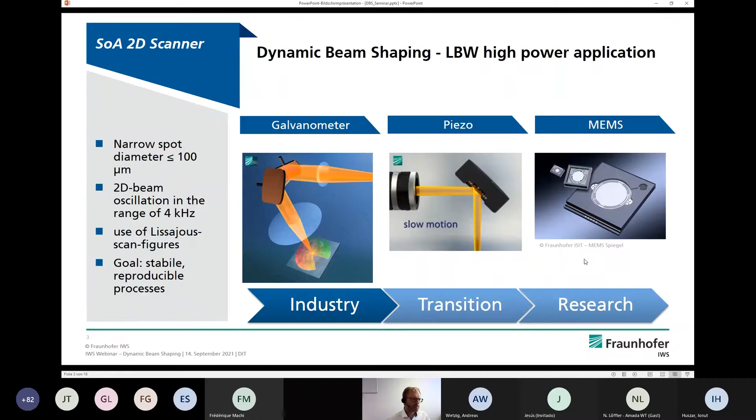If we are talking about 2D beam oscillation with galvanometric driven mirrors, we usually use fine laser sources, for example single mode fiber lasers with Gauss mode, and then we oscillate in a circle, overlaying them with the welding speed. Depending on frequency and welding speed, we obtain different energy depositions.

That could be a homogeneous or an inhomogeneous energy deposition, and therefore we usually calculate this with a specific software tool before we start the welding process.

The same would be the case for scanning a figure in the shape of an 8, and here again, using different frequencies or different amplitudes, we can modulate the energy deposition as shown here. So we have a lot of varieties to interact with the laser beam and the material.

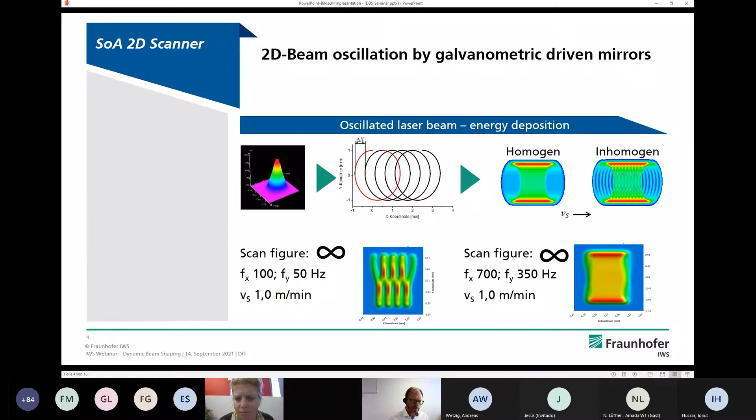Here is an experimental overview for 2D beam shaping with high frequency. We used a 5 kilowatt single mode fiber laser with a really small core diameter, and we obtained a focal diameter of about 33 micrometers. We have used this for welding copper material, which is shown here.

You see on the left-hand side, we have a penetration depth variation between 0.4 millimeters and 3 millimeters. We do all of this in one setup, only by changing the laser parameters, as well as amplitude and frequency of the oscillating laser beam.

Therefore, we are using a circle, as shown here in this small figure, and so we can have different penetration depths and high quality laser beam welding results, especially for these low penetration depths.

The oscillation gives us an opportunity to obtain a smooth surface appearance of the weld seam, as shown here. This wouldn't be possible with a static laser beam.

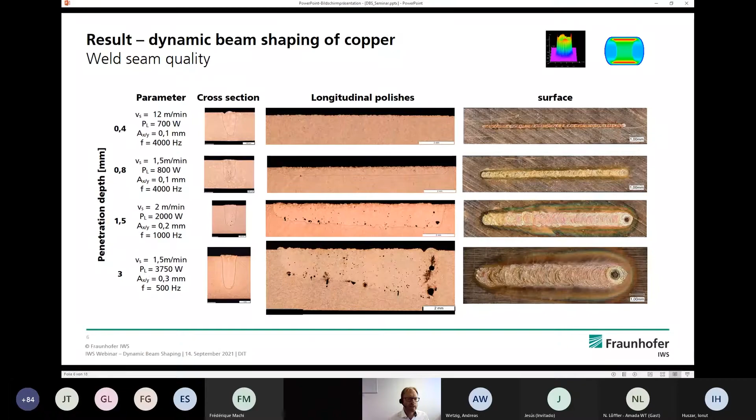Therefore, you would be forced to have at least 2 or 3 optical setups to reach equal results, or maybe not even this homogeneous weld seam distribution, maybe with a lot of inhomogeneities at the surface. Coming now to the second point, 3D beam shaping. Here I would like to give a short motivation.

What we are facing in our research work is that there is a need for a lot of individualized and flexible processes to extend process limits. Therefore, it's not only about the geometry that we are welding, it's also about the material combinations, mostly for mixed materials that I have already addressed, and to be able to have a 3D processing which is quite fast compared to standard welding approaches.

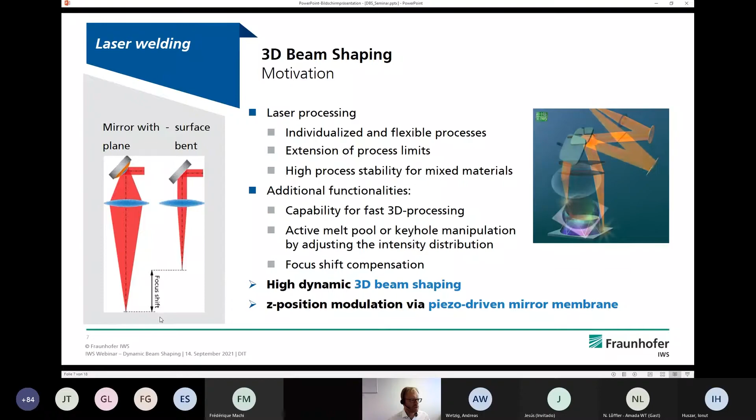The third point would be to have the opportunity, by a piezo-driven unit, to shift the focal position. That is done by changing the plane level of this piezo-driven element, and then you are able to shift the focus properly.

What allows us this is shown here. We have an optical path consisting of collimation, and then a 3D piezo-driven actor for shaping the Z modulation or for moving the Z axis, and then a 2D scanner for moving the laser beam in X and Y direction.

As shown here, if you have no opportunity for this 3D beam shaping, then you would have the issue that if you place a sheet under 30 degrees under the optics, you would have the opportunity to weld the circle, but not achieve full penetration. If you use the focus readjustment, then you have the opportunity to weld the circle with a constant penetration depth. This is one example of 3D modulation.

There are, of course, many more examples with regard to focus shift and so on. At the end, I would like to conclude shortly.

I think what is possible right now is that we have a lot of processes where we actively stabilize the process by 2D beam oscillation. This is also shown by some weldings for aluminum die-cast material, which is already used in industry. We are using the 2D beam oscillation quite successfully with reduced spatter and smooth seam topology.

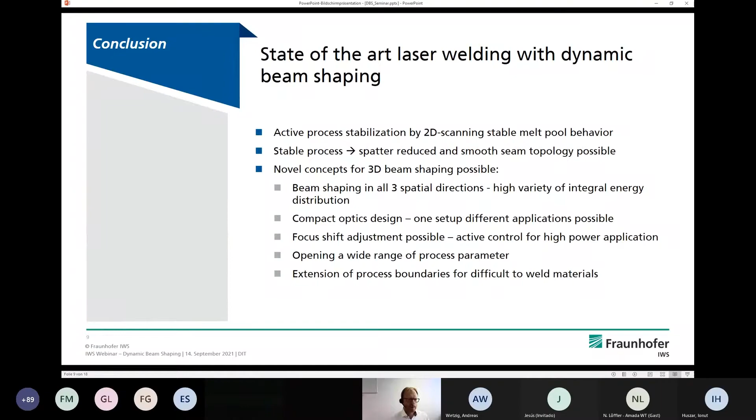We are able to have an active focal shift adjustment, and to do this for high power applications. That opens up a wide range of new process parameters for laser beam welding processes.

At the end, I would like to give a short outlook to the presentation that Andreas Wetzig will give you a bit later regarding this CBC laser source, which we have available here. The opportunities that we have with this laser source will be quite larger than the ones that we have, for example, with 2D beam shaping.

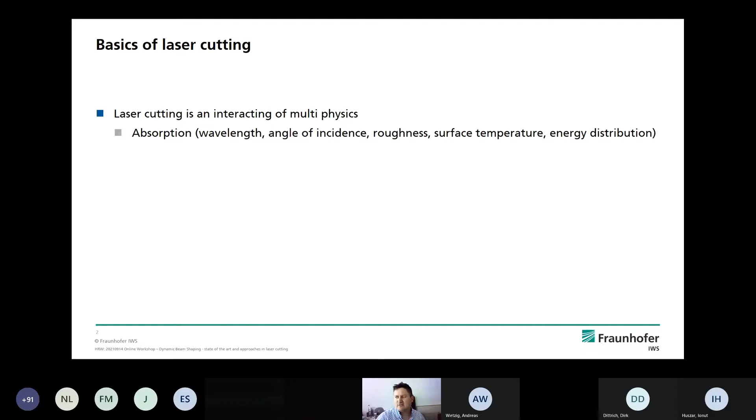The absorption depth of laser radiation is a few nanometers. That means we also need a kind of energy transport to the volume of the process zone. This transport depends on the temperature gradient of the process zone, the heat capacity of the material, and of course also the heat conduction of the material.

And if the material is molten, we also have to eject it. Ejecting depends on the used nozzle, the pressure of the gas we are using, the kerf geometry we are achieving, and of course also the temperature of the kerf surface. So these are, from my side, the three important physics basics we have to consider.

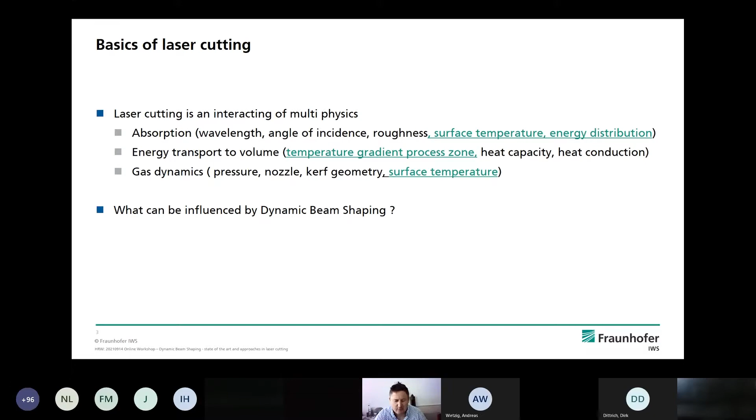But the question is, what could be influenced by dynamic beam shaping? If we look at these three bullet points, we see in every point there is something with temperature distribution and energy distribution. So what we can do with dynamic beam shaping is influence the interaction time between laser beam and material, and manage the number of repetitions of these interactions.

This is no magic, this is well known. All users of laser machines do pulse mode if they want to achieve higher quality, but pulse mode will reduce the output of the machine. So the approach of dynamic beam shaping is to not switch the laser on and off, but to distribute the energy in the process zone.

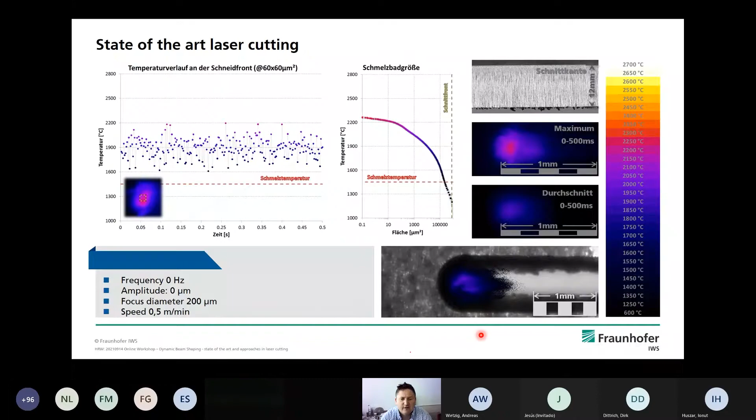So please remind these parameters: we are not using dynamic beam shaping here. Our focus diameter is 200 microns, and the process speed for this cut is half a meter per minute. Please keep your eyes on the width of this cut kerf. If you use dynamic beam shaping, you're able to use a special focal position, a quite higher focal position, which allows us to achieve a smaller cut kerf.

Everybody knows if we do it by standard cutting, we'll get worse cutting quality, so we call it a plasma cut. But if we superpose this with dynamic beam shaping, in this case using a frequency of 300 Hertz and an amplitude of 300 microns, we can achieve quite good quality. And if you look here, also at quite high process speed—we could increase the speed from 0.5 to nearly 1 meter per minute.

What we can see in the diagram and also in this small image or video below is a pulsing of the surface temperature of the cutting front. So we can see that by distributing the energy, we also influence the surface temperature.

And as you remember from my first slide, the energy or temperature distribution will have an influence on the material transport. And even the cut quality is quite better compared to the beginning. So from these two slides, we can see there is a quite large impact when using dynamic beam shaping, and we could increase the quality.

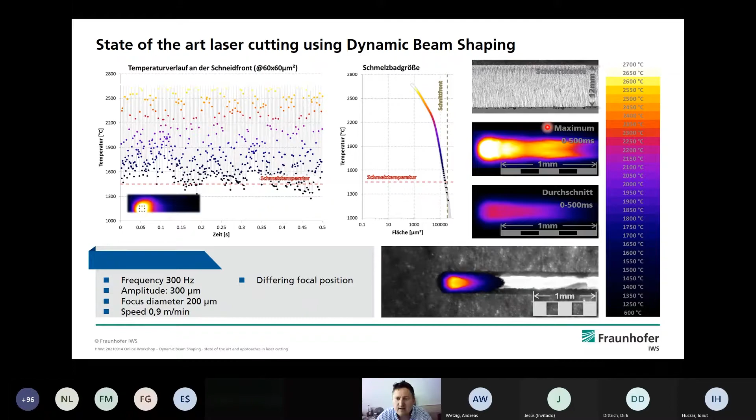So dynamic beam shaping is a quite wide field. We have a 2-axis scanner, which makes it possible to do it in X and Y, and we have a wide range of frequencies and amplitudes. So we can achieve quite different beam shapes.

In this diagram, you see on the X side different beam shapes. We try to name them like how they look: a circle, an 8, or a horseshoe. And we also have our standard state-of-the-art stationary beam. I try to put into this diagram two different parameter sets.

You can see we have a wide range if using dynamic beam shaping to achieve different targets. Here we show a shaped beam with a nearly dross-free cut and smooth roughness, compared to an unshaped beam, where you can see the separation line and quite hard dross attachments. Please keep in mind we are cutting 12 millimeters here using only 3 kW of laser power.

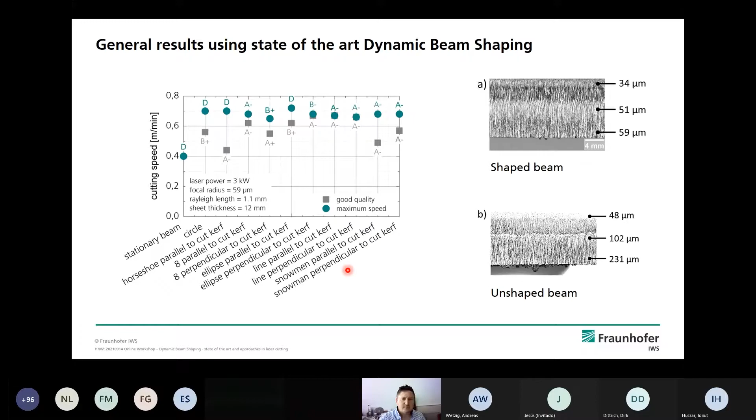So what could we do with coherent beam combining? That's the question I'll try to answer. We can reduce the interaction time between beam and material, and increase the number of repetitions. To see the potential, I made a small calculation.

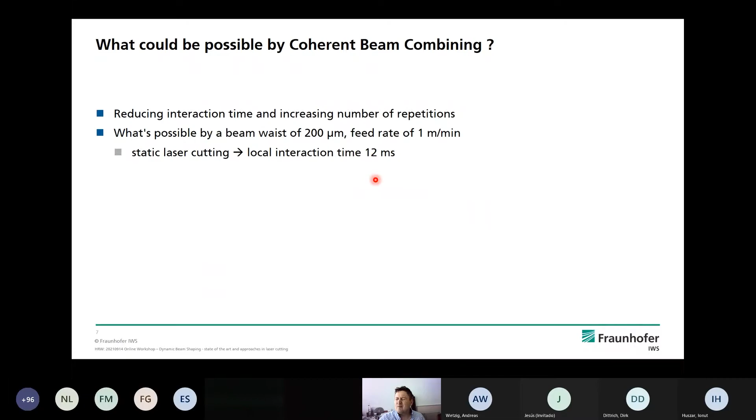Remember, we are cutting this 12 millimeters with a spot diameter of normally around 200 microns and a cut speed of 1 meter per minute. That means for a static beam, we have an interaction time between material and beam of 12 milliseconds.

If we apply dynamic beam shaping with a frequency of 300 hertz and 300 microns using a sinus function, we can calculate the superposed speed of the moved beam. The moved beam of dynamic beam shaping will be in the range of 100 meters per minute, meaning we can reduce the local interaction time from 12 milliseconds down to 120 microseconds.

If we go to the next level, that means CBC. CBC should be able to modulate the beam in the range of 2 megahertz, which means we have the possibility to reduce the interaction time down to 500 nanoseconds.

But the question is, should it be useful? I couldn't answer this question in detail. We have to do some experiments which are scheduled within the next months. But I can give you a picture of my view.

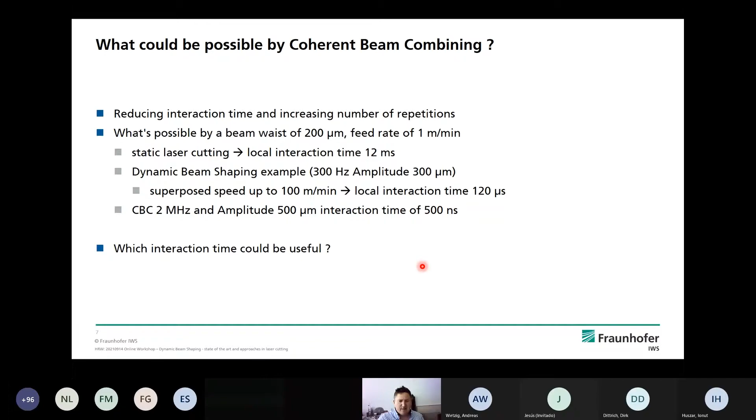Looking at pulsed laser applications, we know that if we reduce the pulse length or the interaction time between material and laser beam, we could increase the quality. Of course, I know the important point is not just the laser pulse, but also the long break between pulses. Still, this should give you an impression that we can influence the process by reducing the interaction time and increasing the number of repetitions.

So I tried to calculate what's possible. You see this table here. I tried to calculate the interaction times and significant beam diameters. 50 microns should be what's possible with the CBC laser, and 200 micrometers is a common focus diameter for laser cutting.

If we talk about our current state of the art using a galvo scanner, we are able to operate maybe in this field, to be in an interaction time around 1 microsecond or even below. If we use CBC, we can enlarge this region quite well. It's up to 5 megahertz, and we will be in this region to have an interaction time around 1 nanosecond.

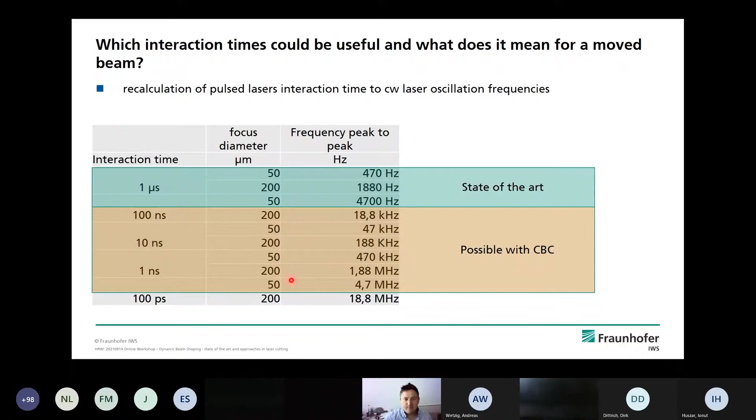You see we have a large adaptation of this functionality that we can use for our investigation in laser cutting. So, I'm now at the end of my presentation. Thank you, and if you have any questions, please feel free to ask.

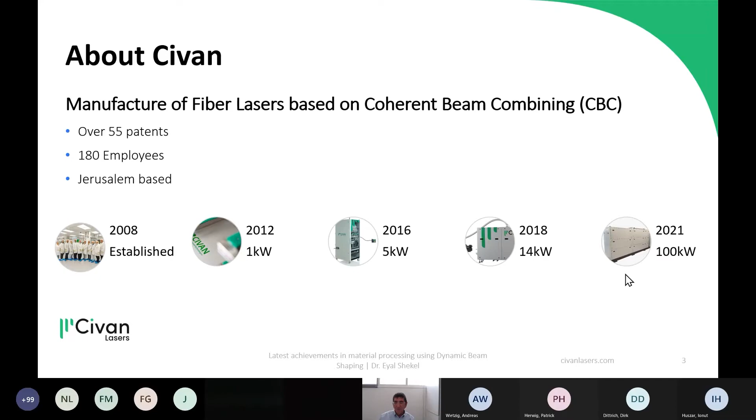Took us a few years to get to the first high power laser. In 2018, we started shipping our standard OPA6 laser to customers. And just a few months ago, we delivered our first 100 kilowatt OPA laser to a customer.

So what is coherent beam combining? It's basically the ability to take many lasers and combine them together to have one single mode output. The way it works is we take some seed laser that can be even half a watt, and then we amplify it. Each one of these triangles is an optical amplifier. We amplify it, split it, amplify again, split again, and amplify again. At the front line, each of these amplifiers can provide up to 1 kilowatt of single mode output. Then we take hundreds of them and combine them to have one combined single mode output.

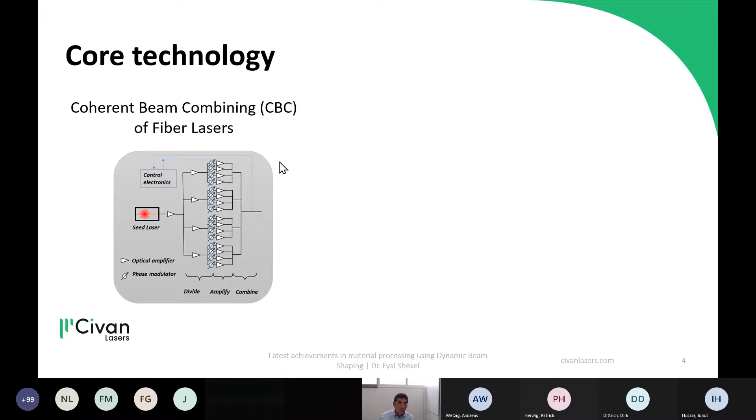That's how we reach more than 100 kilowatt single mode output in our product. We monitor the output, and with some fast real-time electronics, we control the relative phases of these lasers to allow us to do this coherent beam combining. So first of all, here is the ability to get to extreme high power with a single mode output.

But the other part of the technology is what's called optical phased array. It means that we take all these lasers and they emit light in parallel, and there is an overlap of their output. Where there is an overlap, there is interaction between the different lasers, and you get constructive and destructive interference. In some points you get constructive interference where all the energy is focused. In other places where there was light before from each individual laser, they actually cancel one another out, and you get darkness.

This is a very well-known phenomena, basically the diffraction pattern or diffraction grating, where in some places you have constructive interference and in some places destructive interference. But if in parallel we can actually control the relative phases of these lasers, we can make this beam move, change position, change shape, and change focus, all by just controlling the relative phases. Now, changing the phases is just an electronic thing.

We can do it at tens of megahertz. There's no moving parts, it's just an electro-optical device, a lithium niobate device. So it's extremely high reliability, very, very fast. And we can get to these very, very high powers of tens or hundreds of kilowatts with this control.

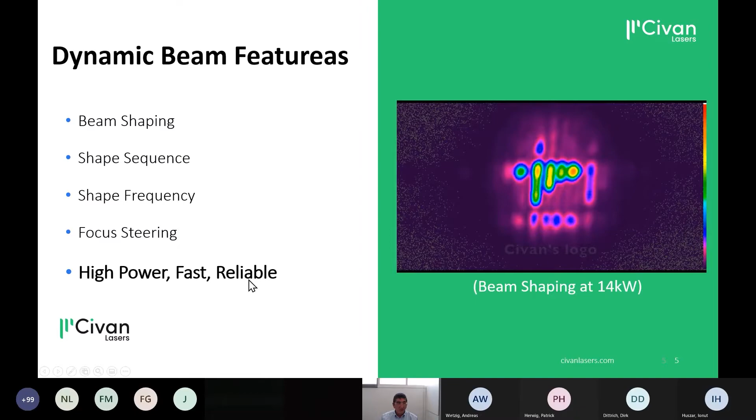And by us, it can move very, very fast at very high reliability, at very high power.

To design these beam shapes, we have this very simple software that we provide to customers, where basically you have a grid and you go with your mouse and click wherever you want energy. Right away, in the window on the right, you can see a simulation of what the beam is going to look like. You can also hover over it with your mouse to see the cross section and know exactly how much energy and what the energy distribution is inside the shape you designed.

You can just go ahead and change the design and immediately see what the energy distribution would be inside this beam. If you click one time, you get some amount of energy. If you click twice, three, or four times, you get more and more energy. So you can really do any type of energy distribution inside this region.

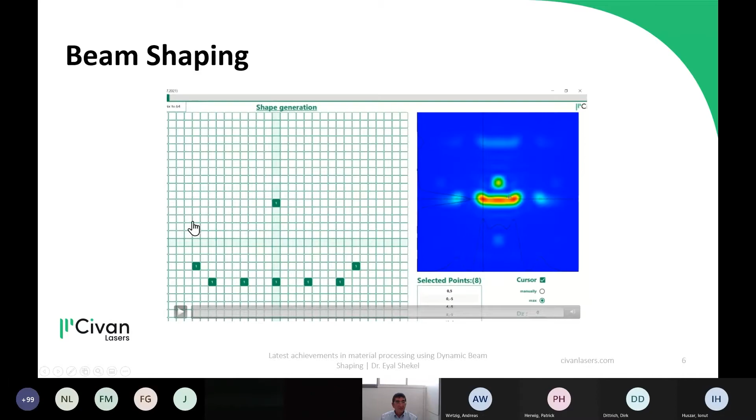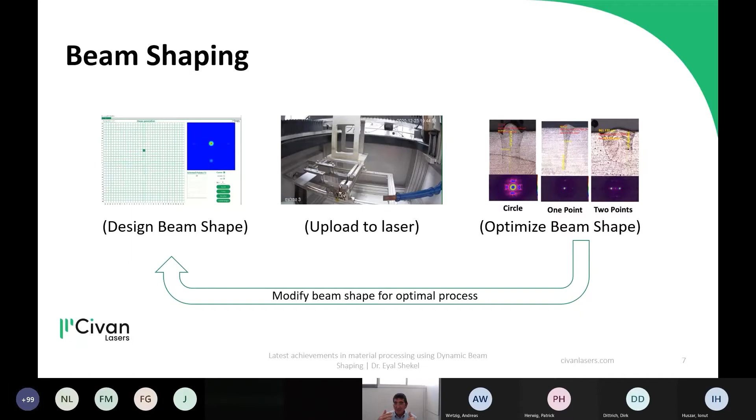Once you have the shape you want, you just save it to the computer, upload it, and do an experiment. You can see different behavior of the weld cross-section when you use different beams, and from this you get feedback and go ahead and change the beam again, continuing this process. Very quickly, you can achieve the optimal process that is required.

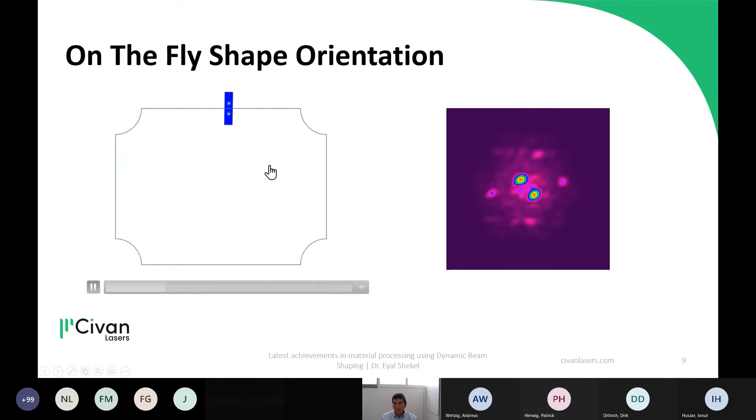Another important element: when we design a beam shape - for example, if we decide on a beam shape of two points perpendicular to the propagation direction, this is the shape we want to use. When we go around and create a part, the orientation of the beam shape always has to stay perpendicular to the propagation direction. For us it's very simple, because we just electro-optically control any shape we want, making sure the orientation of the shape is always correct relative to the propagation direction.

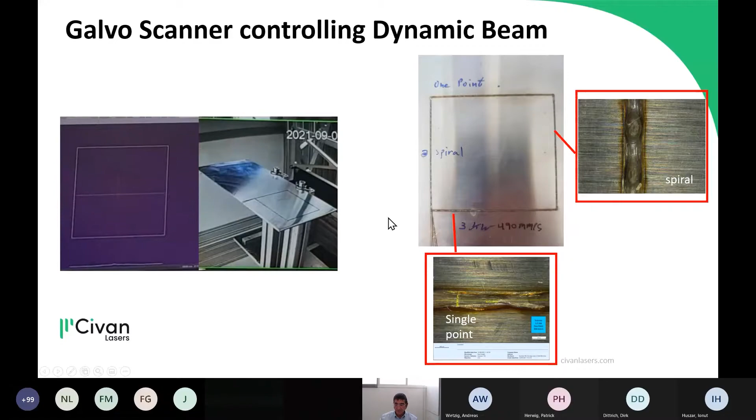Another very important feature is the ability to control the speed of this motion. Like Patrick mentioned, we can do, let's say, a spiral like that. We can move it at 10 megahertz or 20 megahertz to make this beam, so the interaction with every point is in the nanosecond range, or we can move it much slower, as slow as required, and then you can have some kind of dynamic motion of the keyhole in the melt pool, perhaps creating dynamics of the fluid or stabilizing the keyhole.

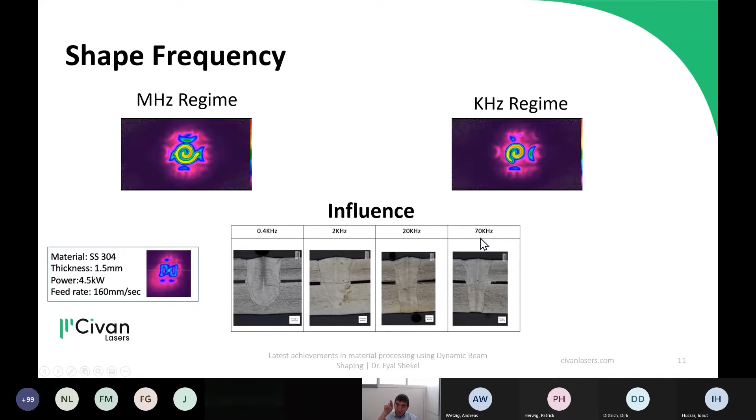Of course, the interaction with the material is completely different. You can see here one shape, with all parameters the same - feed rate, power, beam shape. The only difference is the frequency of the beam shape, or the speed by which we move the beam, and the interaction with the material is completely different.

The next level is actually taking several different shapes and working them in sequence. So we can save some shape, let's say this hourglass shape with some frequency, all the parameters are set, and we save it on the computer. Then we take another shape and save it, and we can actually do 256 different shapes and save them to create a sequence.

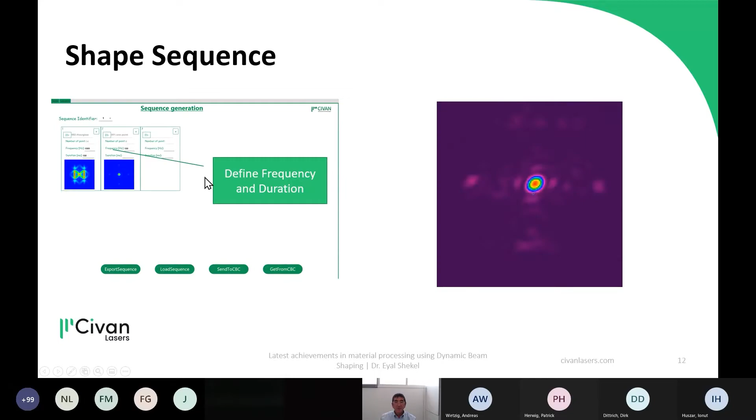By sequence I mean you save it and say, I want the first beam shape for 1 millisecond, then the next beam shape for 10 microseconds, then the next one for 100 milliseconds or whatever, and automatically it goes from one to the other. What you can do with it is all kinds of interesting things.

So for example, if we have here a shape that has a fixed part and a moving part - again, there are many different applications and reasons to do sequences like that, but just to give you an idea of what can be done, having some fixed element of the beam with a moving element of the beam, this is all done very, very easily.

Another interesting application is drilling through a multi-layer material. So for example, if you have a metal coated with some coating, let's say ceramic coating, glued together, and you want to drill through this - of course the ceramic has completely different properties than the metal, so you want to optimize a beam shape that is different for the ceramic than for the metal.

And at the interface, many times there are cracks and separations created when you drill through it. So maybe you want a different beam shape when you go through the interface to protect this sensitive interface region, to avoid these cracks and separation.

So for us it's very easy - you just design a sequence. You do a test and see how long it takes to penetrate each layer. Let's say it takes 150 milliseconds to go through one - of course this is much smaller numbers, but let's say 2 milliseconds to penetrate one layer, 1 microsecond to penetrate the interface, and another few milliseconds to penetrate the metal. For each one you design the right beam shape, and you just drill right through with the changing shapes.

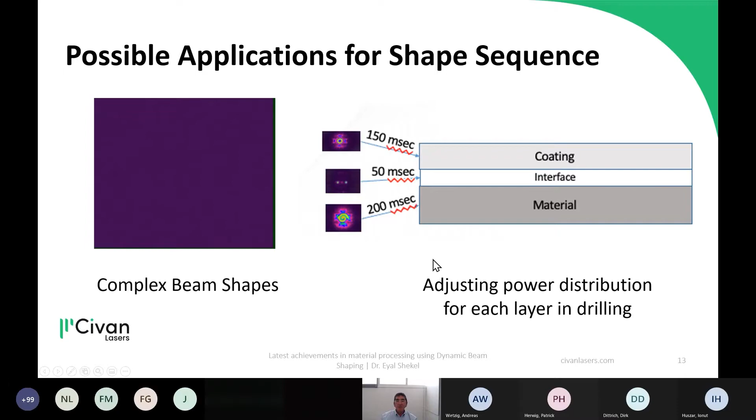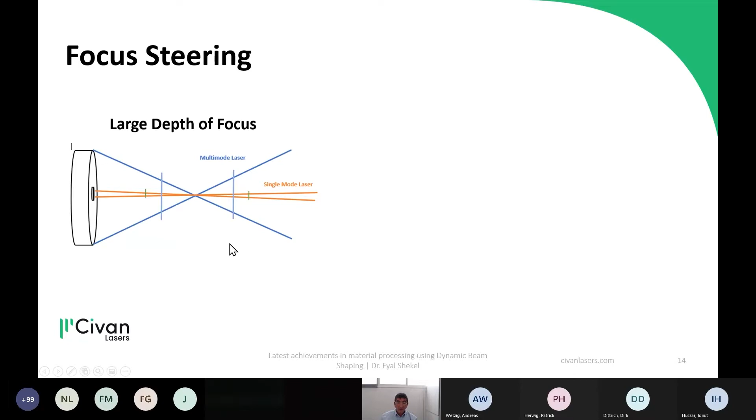But in addition to the inherent depth of focus, we can actually control the focal point to achieve even larger depth of focus. This can be done, again, just like we can move the beam in the XY, we can also move it in the Z, and again this can be done at 10 megahertz over a range of a few millimeters.

And of course, just like was presented in the previous presentation, you get a much smoother cross-section and no dross at the bottom when you do the focus steering. But with our laser, compared to a Galvo, it can be done at any power, at any speed, and very high reliability. So it opens up a whole new set of options.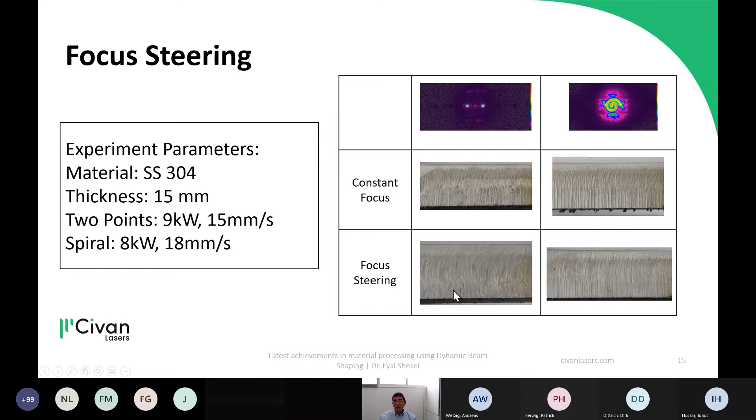So this was the core basic technology, and now just a few applications that we're doing today for automotive, aerospace, and general steel manufacturing. This is all done in our application lab.

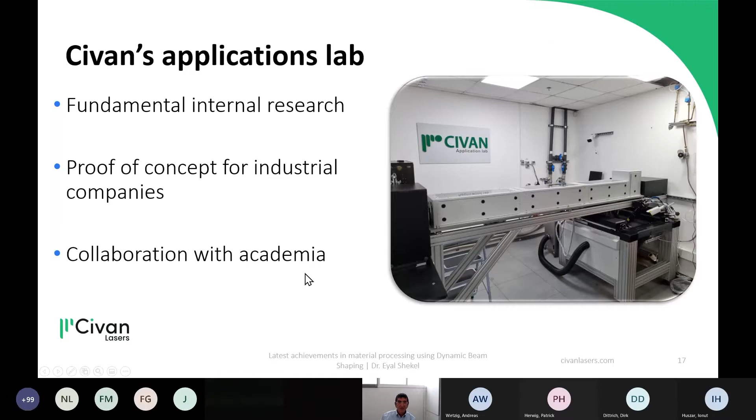So there's a lot of fundamental research that we do for ourselves to understand the parameters. There's a lot of proof of concept that we do for industrial companies, and of course we do a lot of collaboration with academia. So a few examples - this is an example that we actually published together with Valeo and Aimen.

The idea is to take a battery cooler that's manufactured today with brazing and replace it with laser welding. So we got samples. This part represents the cooler, and we developed a very fast and very good weld with good geometry, good strength, no porosity, no sputter, at very high speed. You can see a longitudinal cross-section to see how stable it is. And of course, we did the leak test, and it's leak-free.

So this is one example of the dynamic beam being able to develop a process which is very difficult. I think most of you probably know how difficult it is.

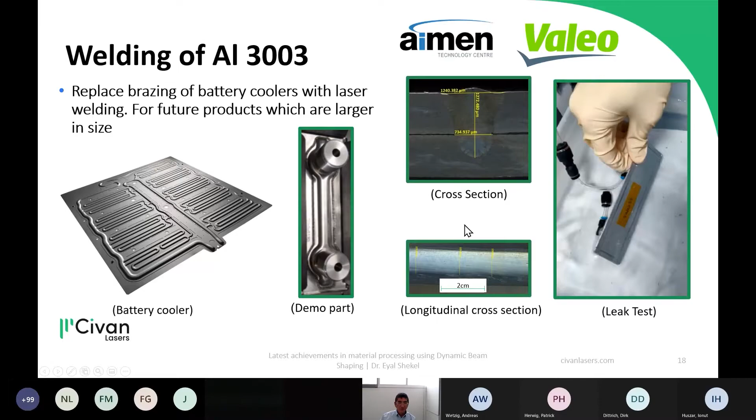So then we wanted to try to see the influence of this sequence that I mentioned. This is work done together with Bosch and IFSW. We created a sequence where we start with a single point, then go to 3 points, and the distance between the 3 points grows, becomes larger, then becomes smaller again. Basically, we increase and decrease the whole beam size. This is pre-programmed in advance, and we change the sequence frequency, how fast it happens. We did it with a feed rate of 500 millimeters per second.

What you can see here clearly is that when you have a slow frequency, you have periodicity, and as the frequency goes up, the periodicity decreases, right? So you can actually see with your eyes the sequence, how it happens.

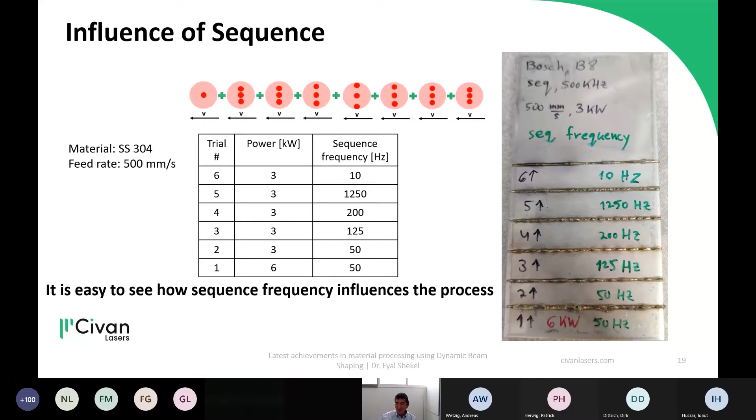Now, this was really done in preparation for copper. Everything we do, we take pictures with a fast camera. This is a nice trick done by Bosch - they overlaid all the frames from the fast camera, and you can actually see the 3 points. We did both this direction and this direction. You can see it in the video, which is low resolution, but when you integrate over many frames, you can actually see the beam shape on the material itself.

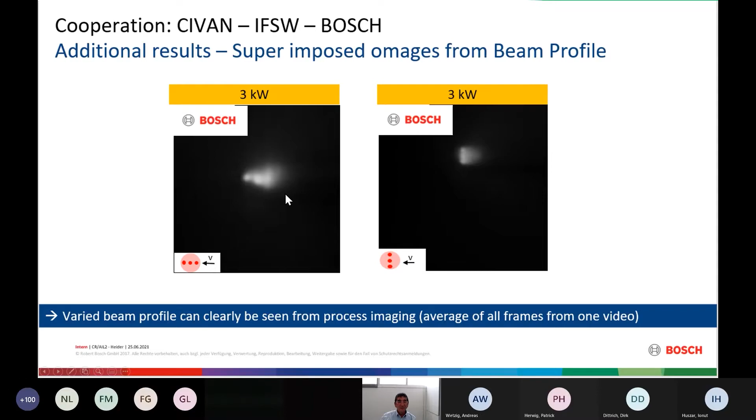So anyway, this was really done for copper to see how we can optimize copper welding. Again, by changing the frequency of the sequence, you can see different behavior in the copper. The idea was to see how it behaves and try to get a very good, fast, and deep penetration weld in the copper. This is still work being done. It's clear that the different beam parameters affect the process and the quality of the weld. We still have to do further work to develop the best results for copper.

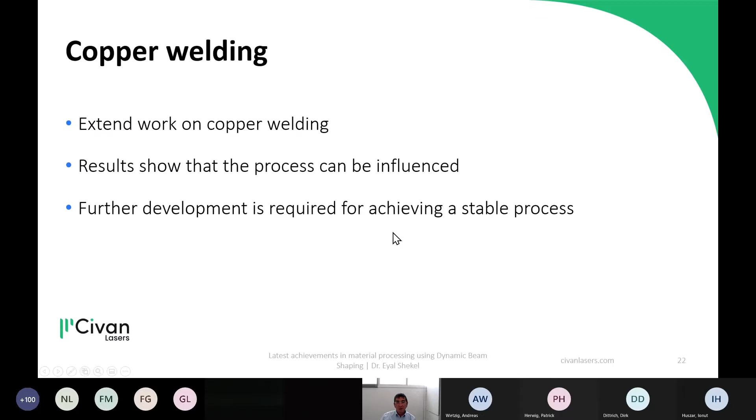Another thing that we investigated is welding of dissimilar materials. For example, we have here aluminum welded to copper, and here aluminum welded to stainless steel. Clearly you can see that by changing the beam shape, you get different results in the weld. You can control both the geometry and the amount of intermetallic mixing between the two dissimilar materials.

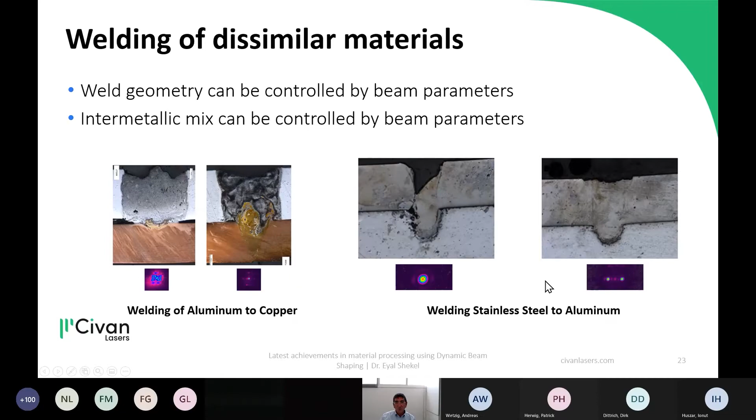Another very important field that we see as a substantial advantage for our laser is deep penetration welding, because we can provide extreme high power at single mode, so you can have very nice deep penetration welding. But again, as probably many of you know, when you do that, you get a lot of porosity. But with the beam shape, and with some dynamics, we can actually get rid of porosity.

Now we can also increase the power. This was done with our standard OPA6 with a maximum of 10 kilowatts, but we have today 28 kilowatt and 100 kilowatt lasers. We anticipate that with the higher power, you can get really high speed, very high quality, deep penetration welding, both in aluminum and steel.

So, without showing more details, just to mention other things happening currently in our application lab: cutting of carbon fiber reinforced polymer (CFRP), welding of amorphous materials, drilling of multi-layer materials, welding coated materials, and removal of enamel coating.

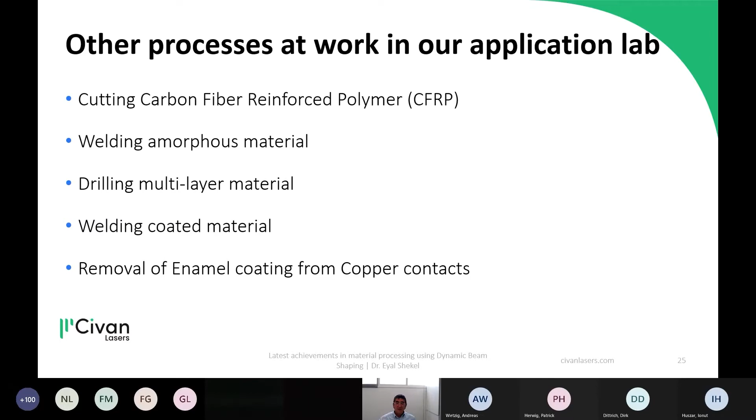So things that we want to do in the future: as we mentioned, our laser can do many things, but if you want to do real-time optimization of the process, we're thinking about taking monitoring systems, cameras, thermal cameras, measuring the depth of the keyhole, and in real time changing the beam parameters to optimize the process.

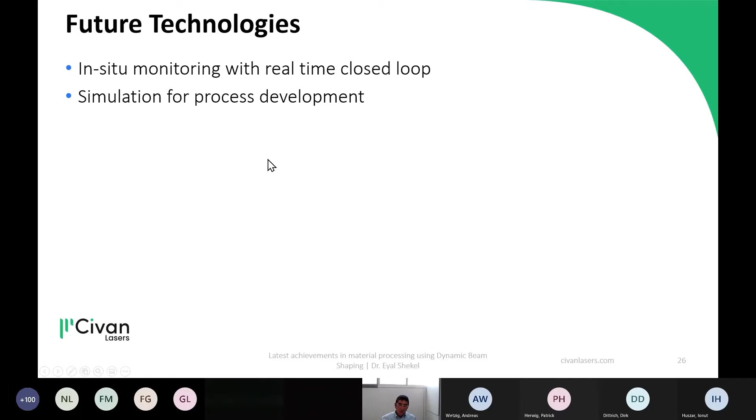The other very important thing is simulation, because these processes are so complex, and there are so many options that you really want to know what you're doing.

This is a nice example from Professor Andreas Otto from TU Wien, where he simulated our beam, basically a ring that can move around at different frequencies. This is at 2.6 kilohertz, and this is at 260 kilohertz. You see right away how different the behavior of the keyhole and melt pool is - a lot of sputter created on the left, and a very nice open keyhole on the right.

So this is a very important tool. It has to be much more developed to be more readily available and useful, but this is definitely another thing we want to do in the future.

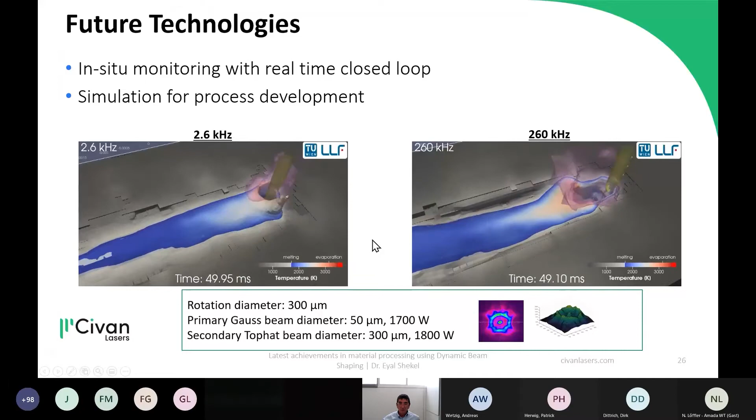To summarize, it's clear that the dynamic beam strongly influences every process. Civan's dynamic beam has many parameters that can control the process that are not available today by any other method. But each application requires optimization and process development, and we need deep understanding and further study for each process that has to be developed.

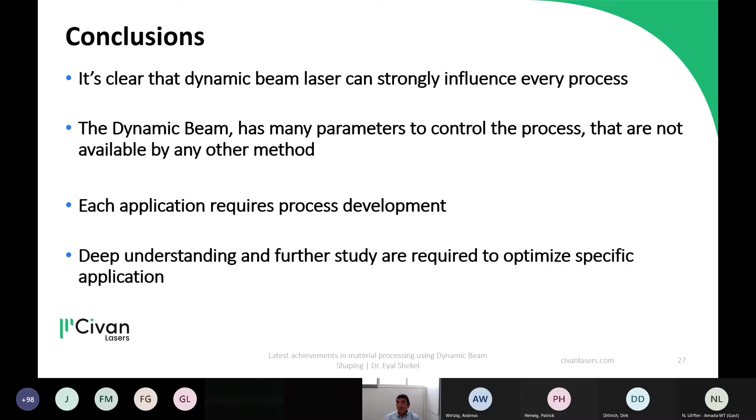And this, of course, is something we want to do with IWS, together with them in the lasers that they have over there and with the lasers that we have over here. So thank you very much.

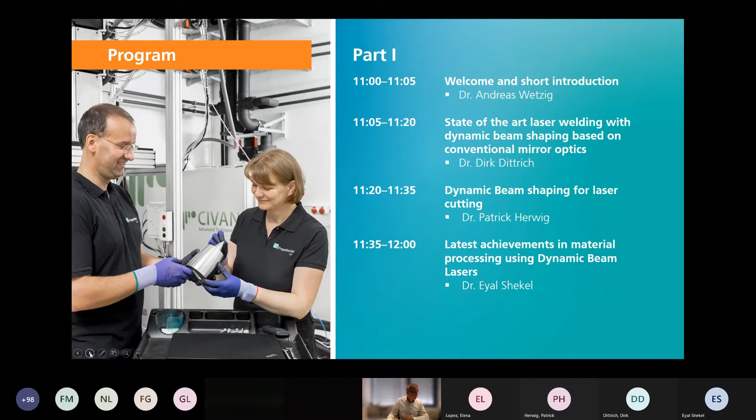So welcome to our novel Civan lab. Here on the left-hand side, we have the operator's place. This is the place where the operator is running the laser if the laser is turned on.

As next, I show you active laser protection walls. The function is to avoid a direct exposure of the operator to the laser radiation once the laser is used for experiments.

Here we have the laser cabinet. The laser cabinet contains the single fiber lasers. We have 32 single fiber lasers. Each laser has a power level of 500 watts.

These 32 single fiber lasers will be guided by 32 single fibers, which are within this hose here, to the beam combining box. The beam combining box actually is the box which is providing the technology of the coherent beam combining. And this coherent beam combining enables the fast change of the power distributions. And this is what we are looking for, and that's why we do have the laser here in this lab.

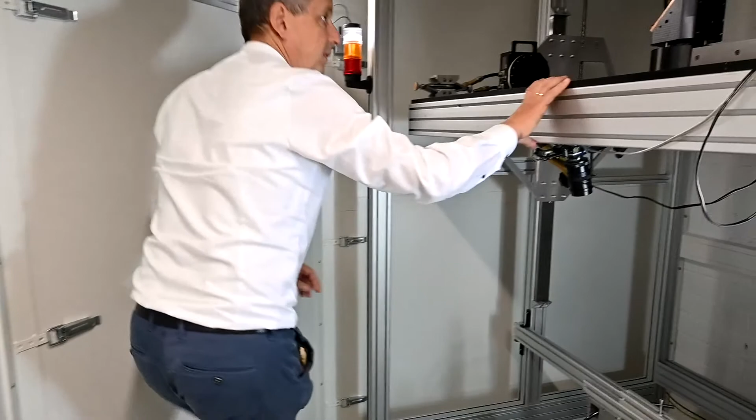Once these 32 single fiber lasers are combined, a raw beam will leave the combining box by this outlet window. The shape actually is square shaped, and it has dimensions of 32 by 32 millimeters.

The raw beam is next focused either by a focusing lens or by a beam bending mirror, which is at the same time a focusing mirror. The focusing lens has right now a focal length of 1.5 meters.

And if we don't use this focal lens, instead of this focusing mirror we have two focusing mirrors. One has a length of 1 meter, another one of 750 millimeters. Here behind the beam bending, we can remove this beam bending unit so that we have the raw beam hitting this plate here, and this device is for an exact power measurement. It's a power meter in order to measure the power.

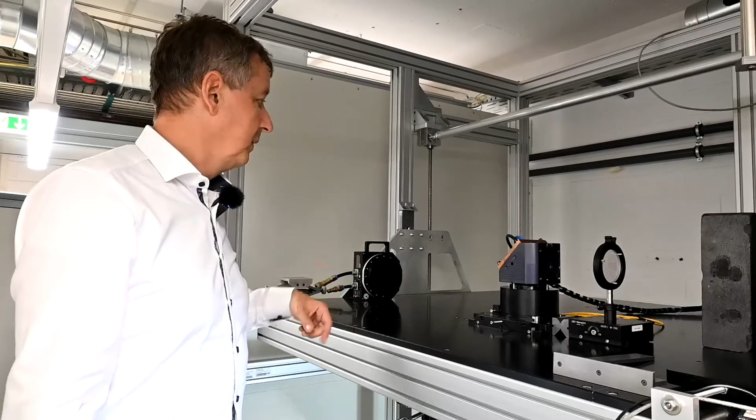Here we have our experimental setup. At the moment, in our first step, we are doing a beam characterization. As I said, we are measuring the power for sure, but most interesting is the power distribution, because that's why we do have the laser here.

Coherent beam combining will provide us unique opportunities to change the power distribution within the focus very fast. Almost each different shape is possible, and in order to characterize this, we are using this so-called microspot monitor. The focal position is about in this level here.

The focal size, the diameter actually of the focal spot, is about 0.5 millimeters. Once we have characterized the beam, we will start with our first experiments. We will start with bead-on-plate trials on metal plate, aluminum, steel. These are the first metals where we start on.

The next trials will be welding trials, and as next we will carry out trials on melting powder and wire by means of the changing modified power distribution, and as a last step we will conduct laser cutting trials.

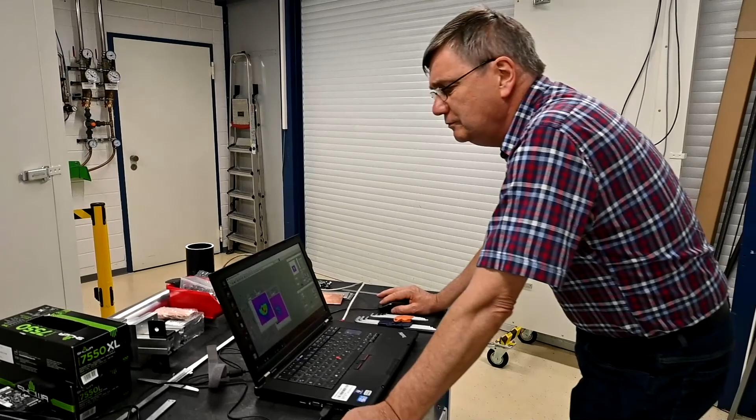So on the next slide, you can see our experimental setup.

So we are using here a focusing lens to focus the laser. Then we have here a beam bending mirror, and right now the focal length is 1.5 meters. We also have the option to use, instead of a plain bending mirror, a focusing mirror with a focal length of 1 meter. And then we're using here the microspot monitor by Primes.

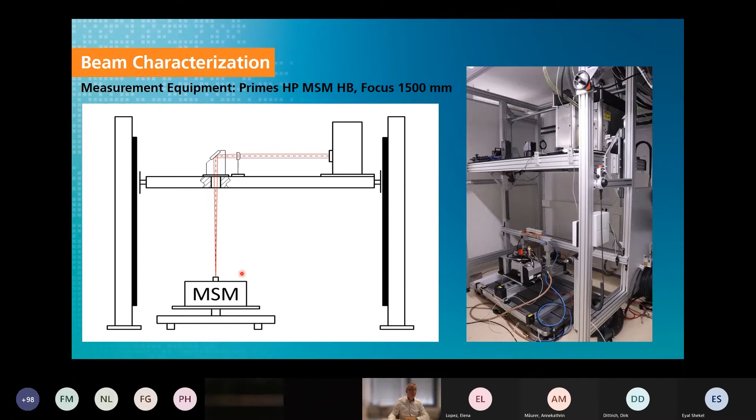On the right hand side, again, you see the machine, the system, and the framework here. And you can see here actually on this arrow where the laser beam is hitting the measuring device.

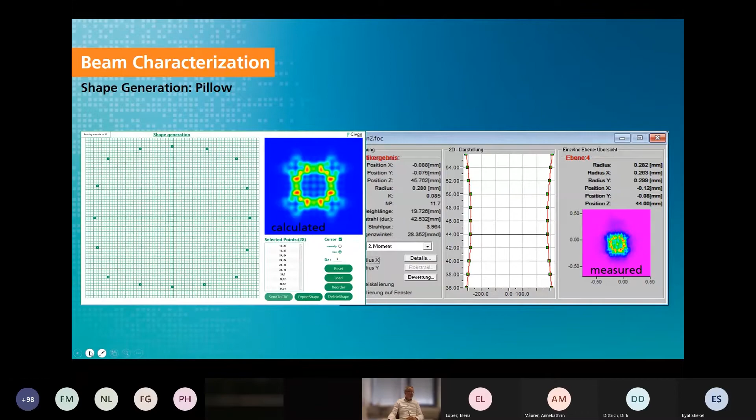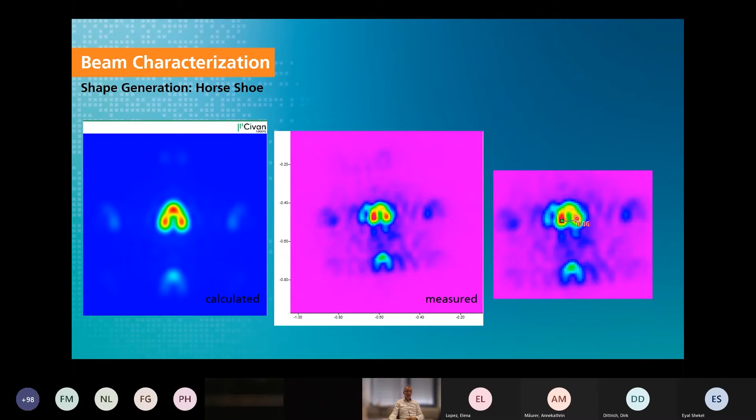Just quite recently, we have removed the microspot monitor from the XY table, and we put a piece of mild steel underneath the laser, and we just did a linear bead on plate welding of mild steel with several speeds. What you can see in this short video is done with a speed of 10 meters per minute and with a power level of 5 kilowatts, as a very first trial, the very first usage of the laser in our lab for material processing.

So I will run this video. I'll just run it again.

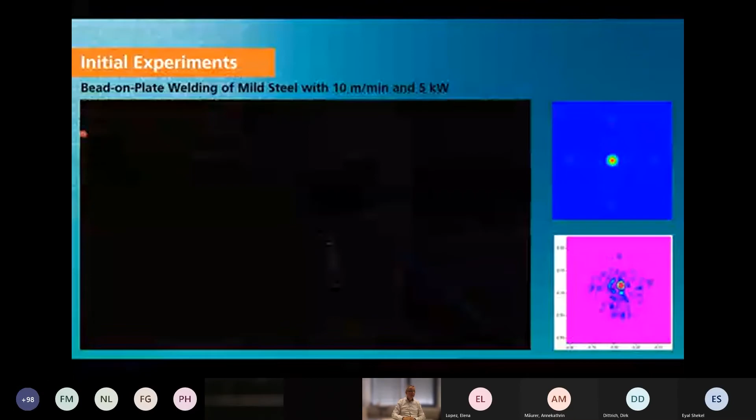Again, these are very first results, and I'm showing them to you to demonstrate that the laser is ready to be used in our lab. So the question is, what are the next steps? What are the next things we have in mind?

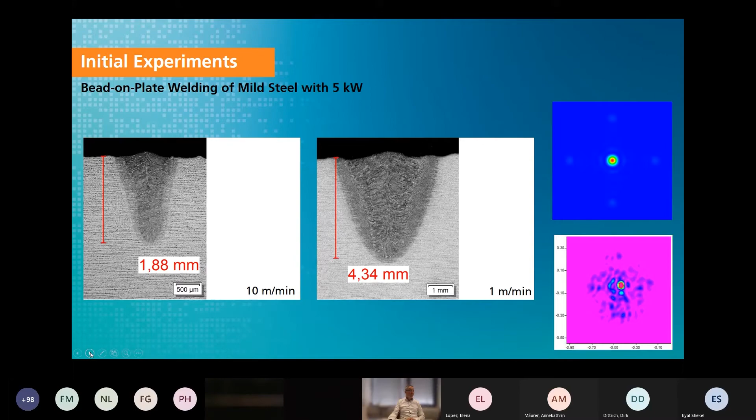We will do some basic research to get a better, more detailed understanding of what is going on, what is achievable with a certain beam profile, and how we can affect the melting pool. That's why we will do basic studies of the effect of different and changing beam profiles on the weld seam shape. We will do the same basic studies on the effect of the fast oscillating opportunity. Eyal Shekel has mentioned that we have the opportunity to oscillate the focus along the penetration depth or along the material thickness, and what kind of effect this has on the weld seam shape. The next step is to transfer these results to a real welding process of thin and thick stainless steel, aluminum and copper.

The next topic, which was already questioned before, we will look at very closely: basic studies of the effect of different and changing beam profiles on metal powder welding. We will do the same or similar studies on the effect of different and fast changing beam profiles on wire welding. And last but not least, we will carry out basic studies investigating the effect of beam profiles and oscillating focus on the performance in the case of laser cutting.

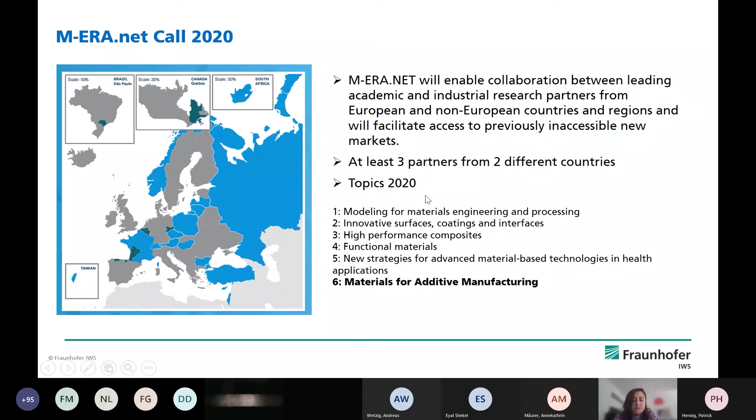As mentioned, we were successful last year in submitting a transnational project in the field of additive manufacturing within the M-ERA.NET call, which enables participation of external European countries. We focused this time on material research for additive manufacturing, and we were successful on the sixth topic of this call. The main goal of this so-called SHAPE AM project, on-the-fly laser beam shaping for laser metal deposition of crack-sensitive aluminum and titanium alloys, was to explore the possibilities of bringing this laser source that Andreas has shown at the lab to process crack-critical materials like aluminum and titanium for additive manufacturing.

So there are a lot of questions still open, like the adoption of this system for the field of additive manufacturing, for the handling of powder, which many of you would know is a challenge in additive manufacturing. But also scoping the advantages of processing wire with these systems, which opens the possibility to skip the whole handling, making it a much cleaner process.

So we will be scoping both directions and making this system fit together with other partners for an industrial setup for LMD in additive manufacturing.

The sub-goals, as we've heard in the different presentations today, include using this innovative laser beam shaping to enhance control of the melt pool for additive manufacturing - meaning better control of shape, size, dynamics, and oxidation issues related to the melt pool, and reducing cracking, which is an issue not only for aluminum and titanium alloys but also for high temperature alloys like nickel-based superalloys.

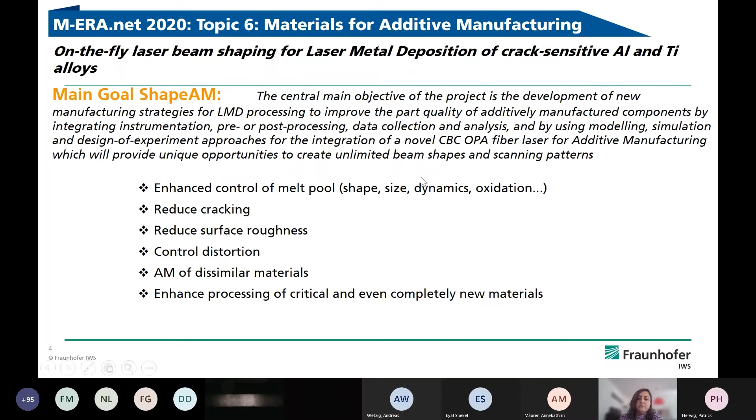Beyond the scope of this project are approaches for AM of dissimilar materials - using this system to combine materials for multi-material AM and enhance processing of critical and even completely new materials. As we know from material development in additive manufacturing, by using LMD we can aim for in situ alloying to create new alloys, and this new technology may help enhance that processing.

The consortium consists of Fraunhofer IWS, as mentioned, in the role of coordinator, improving available system technology with wire and powder, carrying out process development in that field, supporting colleagues working with Andreas Wetzig on simulation with empirical data, and carrying out material analysis and testing together with our materials experts.

And at the end of the project, we will have a demonstrator, for instance in the field of aerospace or space, based on aluminum and titanium alloys.

Civan will scope the possibility of using their beam shaping technology, the laser beam sources, for use in additive manufacturing, and will support us in defining parameters, programming, and this 3D temperature tailoring, and will also test with us these new crack-sensitive alloys.

So we've scheduled some alloys that are now quite relevant in the community, like scalmalloy and AA2219. Those of you working in aerospace would know these alloys, and titanium 64 as a reference.

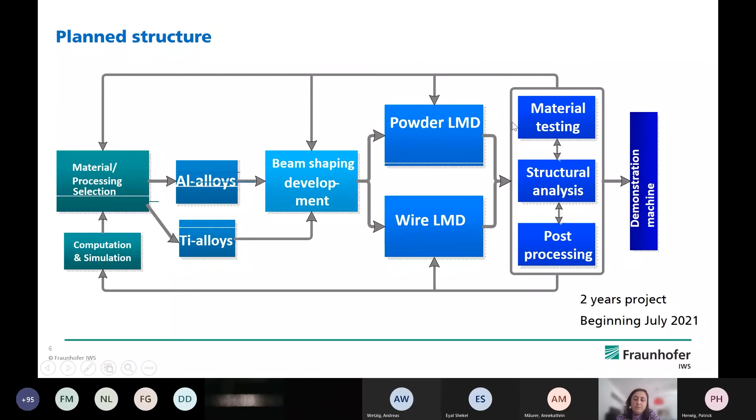Obviously, a lot of work in parallel for the different alloys. We will be starting, or have already started, the project in July at the lab Andreas showed you before. So the first steps will be implementing the environment for additive manufacturing in this lab, starting reference experiments with powder, and generating material data for the simulation paths we're going to follow in this project.

So the objectives are the definition of optimal beam shapes at the end of the project for powder and wire LMD, the simulation of new beam shapes and beam deflection rotors for an optimal powder and wire LMD process, the design of a prototype together with our industrial partners relevant for industrial application, and material development, production of specimens, and destructive and non-destructive characterization of these specimens for the application.

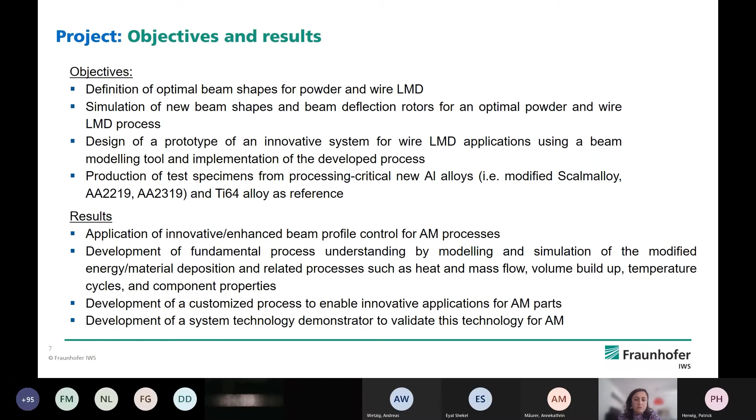So we hope at the end of the day to have a system, a machine, at least a prototype, able to be used in industrial applications together with Civan and Kotlia, and to have demonstrated this technology - control of cracking, control of distortion, and tailored material properties with these alloys - on a real, interesting industrial demonstrator. Just to summarize the scopes.

So I wanted to share with you some of the struggles and challenges we are facing while using this system for the first time for additive manufacturing. Andreas already showed very well the actual situation at the lab.

And the situation, as mentioned, is that the beam exceeds the collimated shaping unit, and we have a beam shaping figure only defining focus, and we need to make this system suitable for the additive manufacturing process. We will be starting with the reference process with powder, so we need powder handling, at least in a rudimentary approach, and we need the exhaust system to work safely.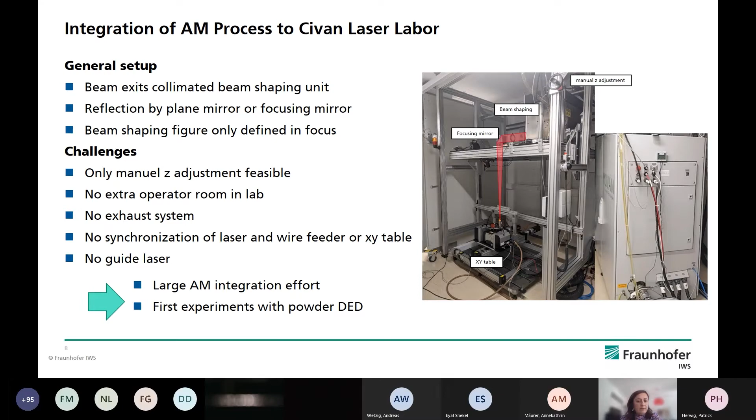We have at the moment no synchronization of the laser and the wire feeder or XY table, but we will implement this, and also work at the very beginning with a manual z adjustment. In the next months of the project, we will see how to make this automatic, as in other available LMD systems. So the next step is to ensure the process enclosure.

We need beam shielding to avoid reactions and oxidation. We will construct the nozzle holder. The coax nozzle technology is made in-house at IWS, so we have valuable experience already on the construction and adaptation of these nozzles, and then integrate the exhaust system as mentioned.

The first planned experiments will focus on the buildup of cylindrical geometries with the beam shaping, using this manual z adjustment, and diffuse the powder sprays to make use of the laser figure visible with this system. We will start with some standard materials and then move to the project materials.

In the meantime, parallel to these activities, colleagues with wide experience in simulation will feed the micro and macro models with already available data on thin-film LMD from IWS to develop and implement this two base model system, and do a model calibration to compare with empirical work.

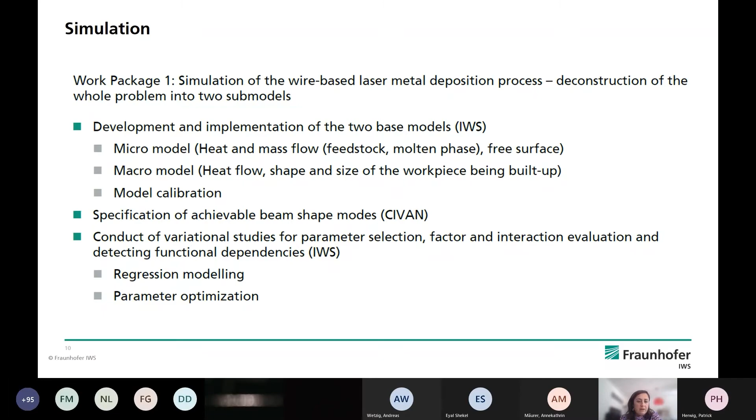I'm not an expert on simulation, but we fortunately have support from colleagues working with Andreas. There are some challenges, as you may know, while working with these simulation processes and also from the process side, such as following the phase change, modeling the Marangoni effect—well known for LMD processes and especially challenging for aluminum—and concerning the evaporation side effects of some elements taking part there.

So we will study the surface tension, viscosity, and empirical constants, and the free surface issue will also be taken into consideration. We can modify the shape and size of the deposition track, and we'll focus on this for feedback from the simulation, finally using all of these facts for model calibration.

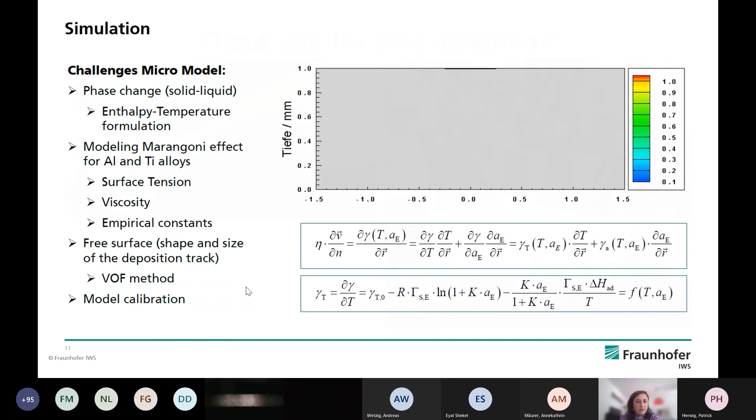So this is from my side. As you have noticed, the project is quite young, and we are very happy to work in the upcoming years on this technology. We'll be happy to share with you in upcoming conferences, hopefully ISAM, or if not, upcoming ICALEO conferences and so on, first results on this technology for additive manufacturing. Thank you for your attention.

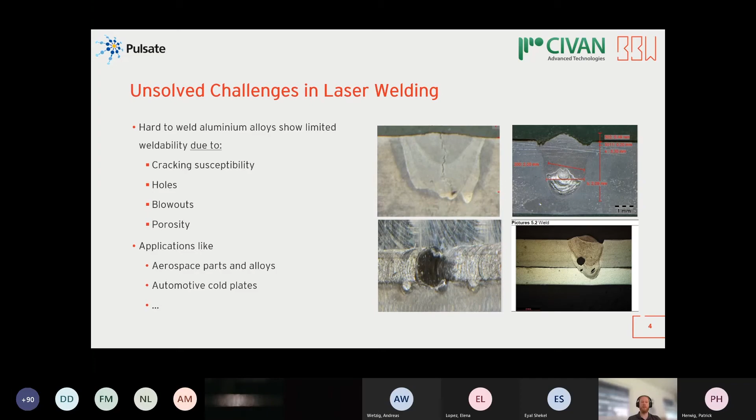So we need to start with some basics. It's well known that laser welding, or welding in general, is never a 100% clean process, and weldability also depends on the material used. Let's talk today about aluminum alloys - they have a hot crack danger, as well as other alloys with high pore formation. There are, of course, different strategies existing against these welding defects, mainly with some kind of beam shaping. This topic is nothing completely new, but all these strategies are very limited in their area. I want to shortly present 2 existing strategies already well established in industry.

One strategy against welding defects is wobble welding. We have 2 mirrors inside the scanner, and the combined movement results in a 2-dimensional, very dynamic movement. For example, using a circular oscillation geometry, the laser beam passes over the same position several times and interacts with possible gas bubbles inside the melt, leading to degassing. It's a great technology, but acceleration and speed are limited by the mirror masses. State of the art is a maximum of 4 to 6 kilohertz wobble frequency with this system. Therefore, wobble welding in combination with high-speed welding is until now hardly possible.

Also, investigations with pressure cast aluminum, which has very high base porosity, suggest a much higher necessary frequency is needed. So this is another interesting investigation topic, not only for us.

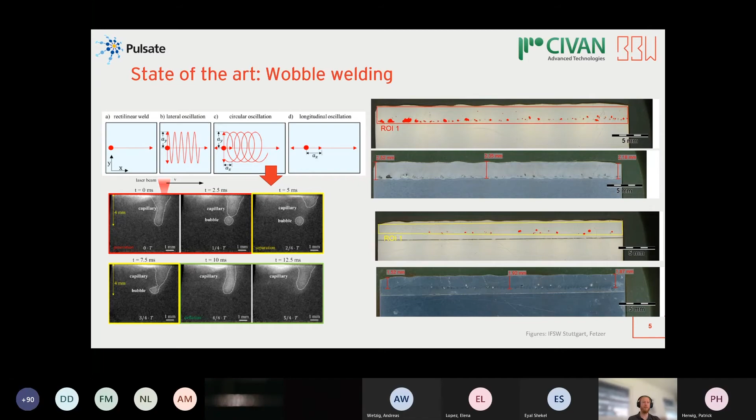Another existing strategy is the usage of superimposed intensity distribution realized by a 2-in-1 fiber. There are different comparable technologies like Brightline from Trumpf, or AMB from IPG, or from Coherent. Around the core fiber is a ring fiber, and the additional laser intensity in the ring leads to stabilization during welding and less spatter. However, here too we are limited in the form of the superimposed beam - only concentric superimposed intensity distribution is possible, nothing else. And we are also limited in the speed of change in the intensity distribution. For example, a multi-spot beam would be very interesting for evaluating possible hot crack danger degrees.

So we have now seen the limitations of existing technologies. They are available, but can only address specific problems in a limited way. We have already seen today that Civan has developed a unique technology for high power applications called coherent beam combining. BBW has always been early adopters of new laser technology—for example, we were one of the first using new fiber lasers, and we used very early scanner technology. Now we consider the Civan technology with its dynamic beam shaping to again be a possible game changer for the laser as a tool in material processing. That was the reason we made the decision to invest in this technology.

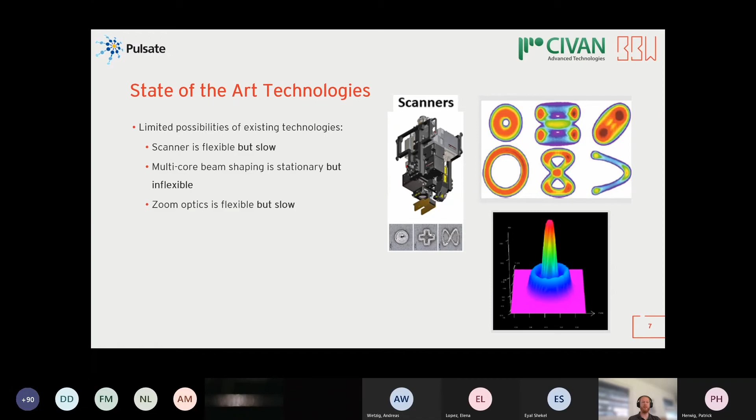This technology addresses all these limitations of existing strategies. We could do wobble frequencies in the megahertz range, any shape of multi-spot or superimposed intensity distribution, and even beam shaping in the Z-axis.

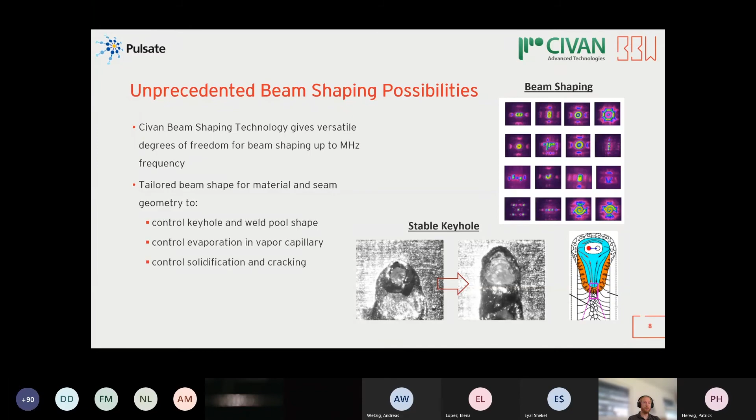So our experiment consists of two main topics. As well as the IWS, we want to build up a laser machine with the Civan system. In contrast, this machine will contain a scanner optic for the realization of short and remote high-speed welds.

What I know is that we will be the very first to combine a scanner together with the Civan system. The interface should also be industrial-ready for future series applications. This is very important for us because we are a job shopper and we earn our money using laser systems for our applications. Second, when the machine is working and general functionality is proven, we want to investigate some of the already mentioned approaches, beginning with hard-to-weld aluminum alloys.

There are many more investigations possible, but within the limited timescale of the Pulsate project, we will concentrate on the build-up of this demonstrator and first investigations with example hard-to-weld aluminum alloys.

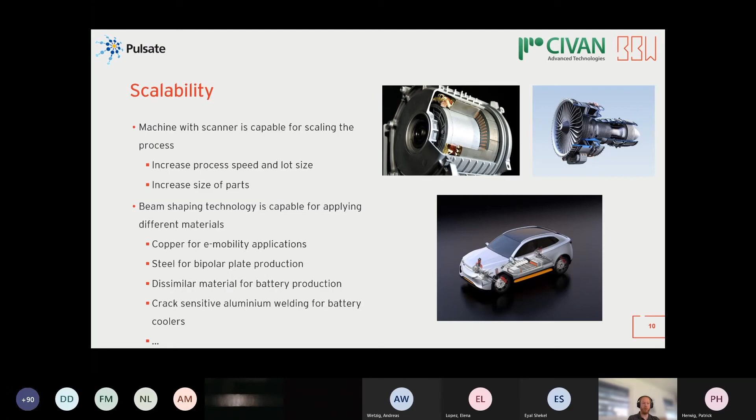So this is all. I hope I gave a little insight into this just-started project, and I'm now open for questions.

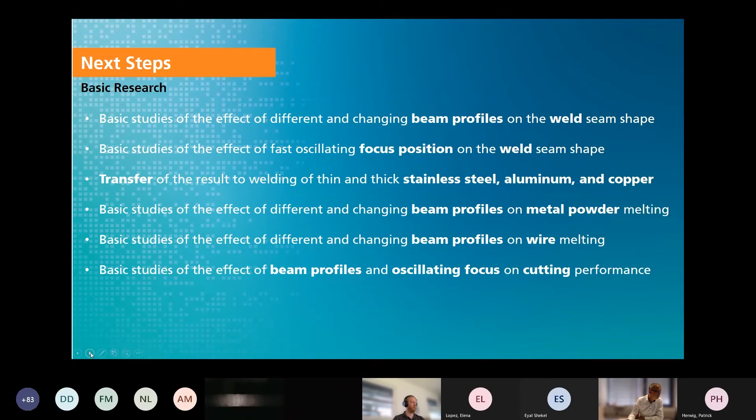First of all, our lab here in Dresden at Fraunhofer IWS is run jointly between us and Civan. So the laser is Civan's property, whereas the rest of the system and the lab is owned by us.

In general, the lab is accessible for any industrial customer for its research. However, the experiments will be supported by Fraunhofer's staff, and if required, also Civan staff is available. Customers are allowed to use their own equipment like clamping devices, processing heads, and for instance characterization tools.

So these are just the conditions, and nevertheless we will continue with the basic research and with the introduced publicly funded projects in order to learn what kind of capabilities the novel laser system will provide to the community of laser material processing.